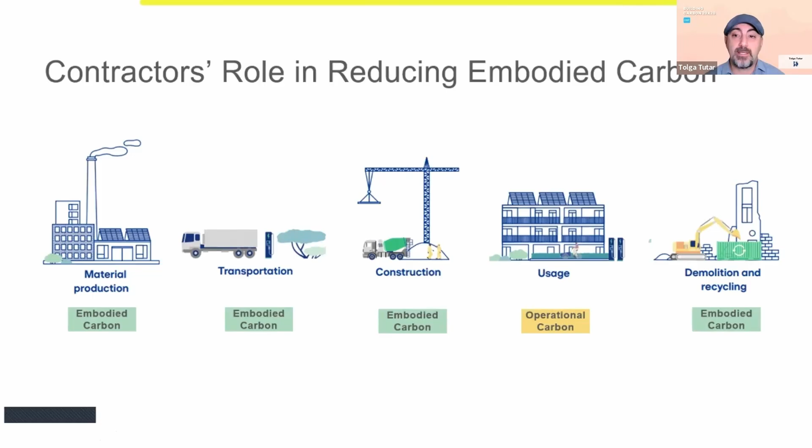As Stacey underlined, embodied carbon emissions associated with material production, transportation, construction, and end-of-life scenarios are critical. And general contractors like Skanska can make a big impact in addressing and reducing these emissions significantly in built environments. Embodied carbon is expected to be responsible for almost half of total new construction emissions until 2050.

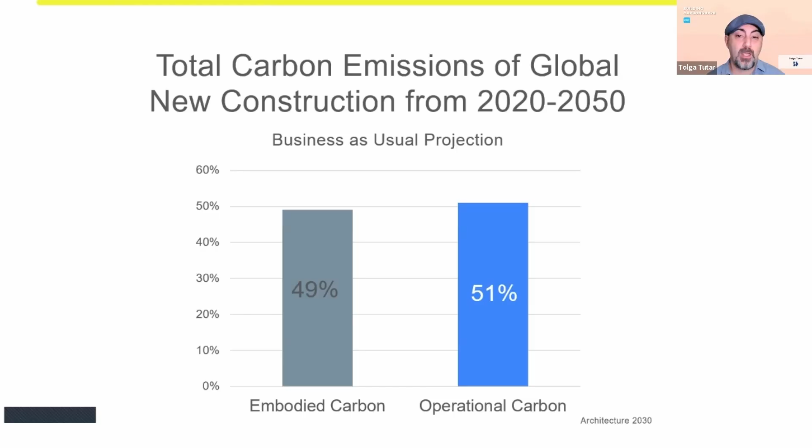And as general contractors, we are in construction business that we would like to grow, but we have the ability and responsibility to provide solutions to minimize the climate impact of the structures that we build. While we are expected to be doubling the amount of building floor space in the world in the next 35 years, which is equivalent to building an entirely new New York City every 35 days, what are the key strategies that general contractors can support or lead to address embodied carbon in the structures and the buildings?

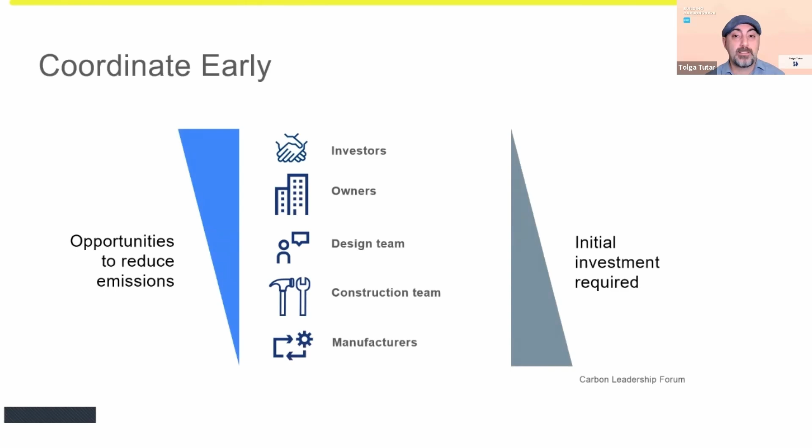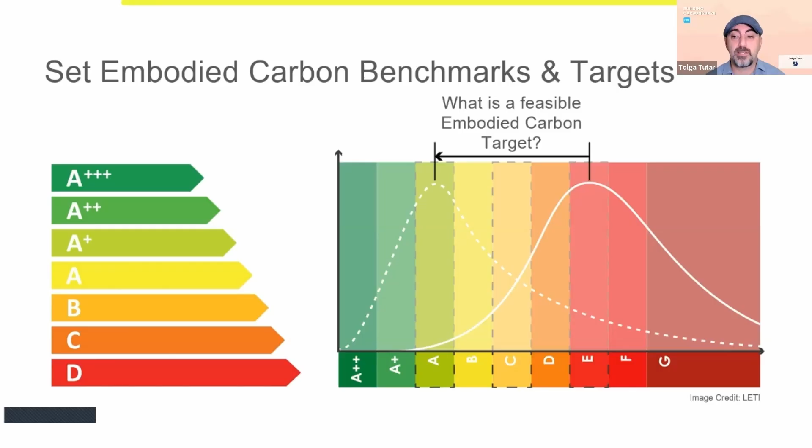Well, many low-cost, high-impact strategies to reduce embodied carbon require coordination with all key stakeholders early in the project. Contractors' early involvement in this process allows them to provide very valuable feedback regarding procurement, cost, material carbon data, technical feasibility, and more. Then, setting net zero embodied carbon targets early in a project is another crucial step to maximize reductions and also minimize costs. Contractors' feedback early in this process can really help in setting up these baselines and embodied carbon reduction targets for the project.

And to tackle embodied carbon, well, reusing buildings is very important. In a recent study we conducted, we have found that when an average performing existing building is demolished and a new energy efficient building is constructed, it takes between 10 to 80 years for the new building to overcome its construction-related emissions through efficient operations.

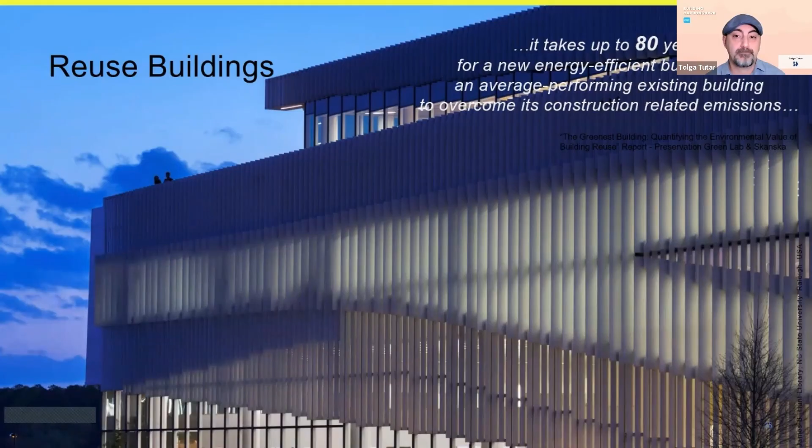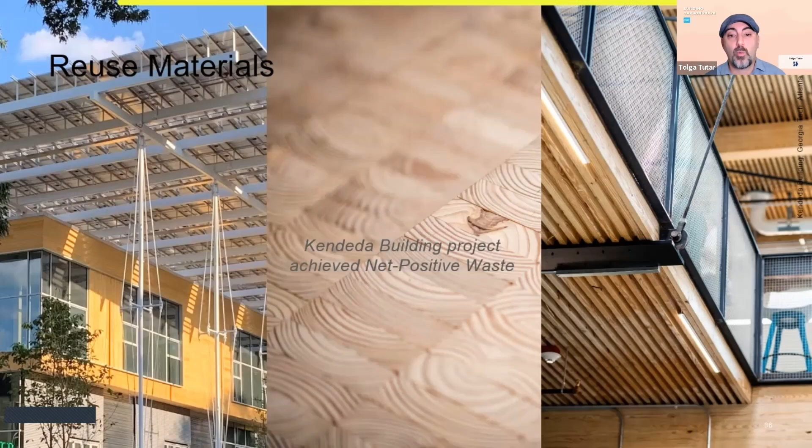And whenever possible, reusing materials instead of purchasing new products is another great strategy. In our Kendeda Building project, one of the most sustainable buildings on the planet now, our team achieved net positive waste by salvaging and reusing more materials destined to landfills than the amount of waste we generated on site.

And considering most of the embodied carbon is typically in the structural system, contractors should work closely with the structural designers and look for ways to achieve maximum efficiency on structural components to reduce the quantities of materials. This process can be expanded to all materials after addressing the big ticket items.

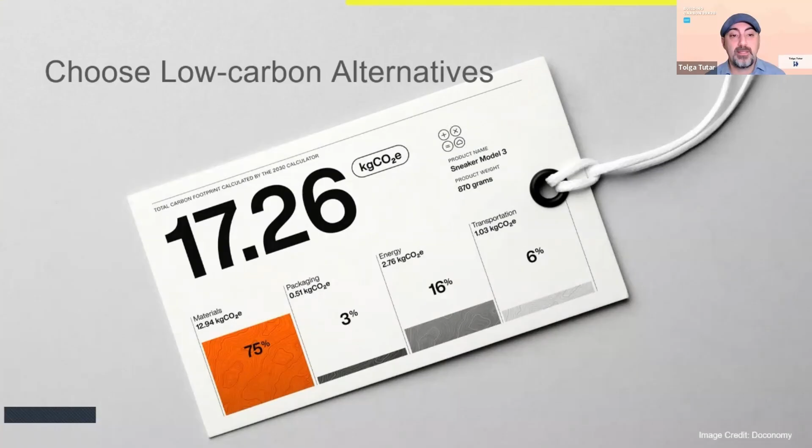And as Stacey mentioned, environmental product declarations or EPDs are great tools telling the life cycle impact story of a product. Project teams can choose low carbon alternatives based on EPDs, and requiring EPDs in specifications will further help contractors to ensure that the necessary carbon disclosure is provided during procurement.

Now we have the optimized material quantities and material-specific carbon data in hand. Contractors can play an important role with key milestones in creating and refining project embodied carbon estimates alongside cost data by utilizing tools like Embodied Carbon in Construction Calculator, EC3.

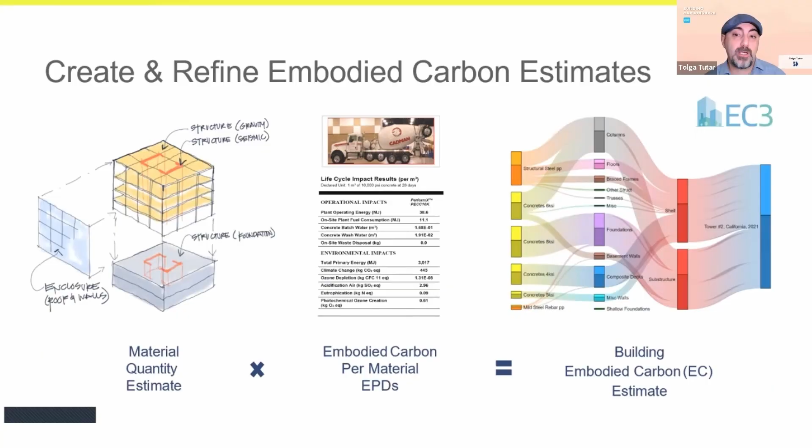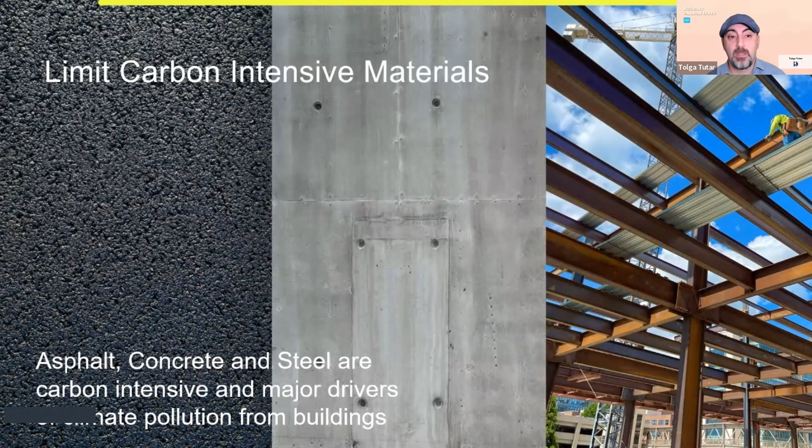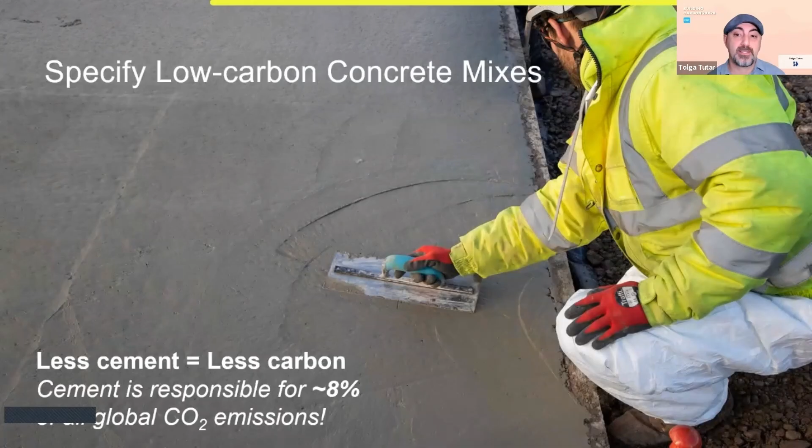And for products that typically have very high embodied carbon footprints, such as asphalt, concrete, and steel, thoughtful use is essential. It's important for contractors and design team to work together to limit such materials and opt for lower carbon alternatives as applicable. When we talk about concrete, to reduce the carbon intensity of concrete, it is important to reduce the amount of cement in the mix because it's responsible for 8% of all global CO2 emissions. And contractors should work closely with structural engineers to design low carbon concrete mixes by implementing innovative solutions.

Then next step might be using agricultural products such as timber, cork, or hemp insulation that sequester carbon, which is also crucial. In our Portland Airport project, we are building a 9-acre large-span mass timber roofing system, which is regionally and sustainably sourced and reduces the embodied carbon footprint of the project significantly.

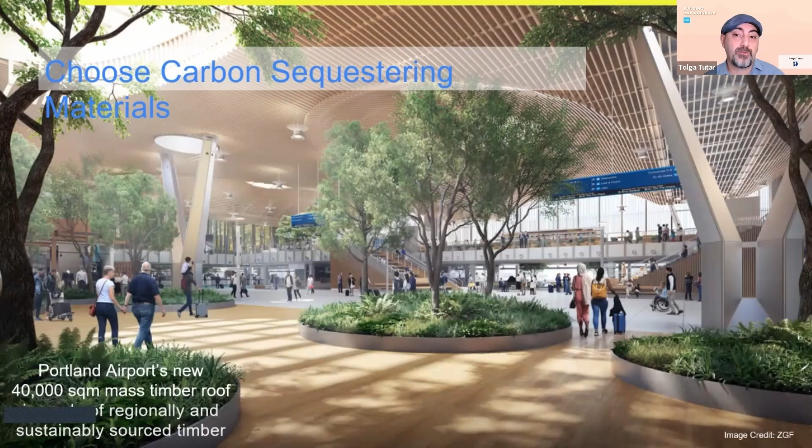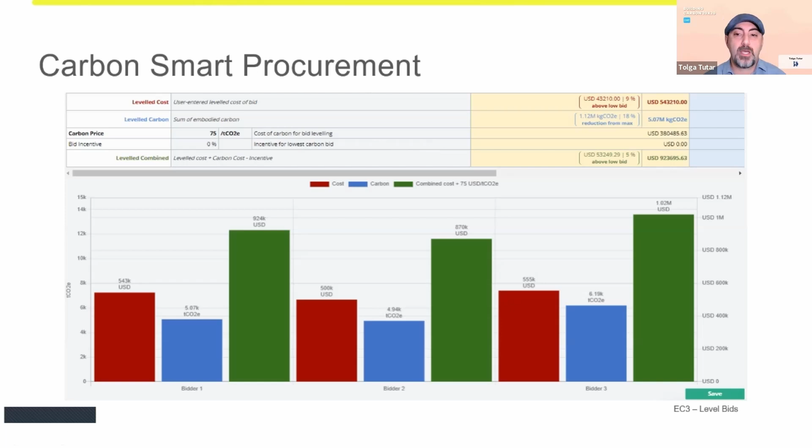Next, carbon smart procurement is essential. We can enforce subcontractor bids to contain the quantity, cost, and carbon data, which enables the bids to be compared with each other and evaluated against the initial carbon targets for the project, which can be done easily with EC3. And while talking about procurement of low carbon materials, we always get the question about the cost premium. In a recent study we published, we found that the embodied carbon footprint for most of the projects can be reduced 30 to 46% with minimal cost premiums, obviously depending on the market conditions.

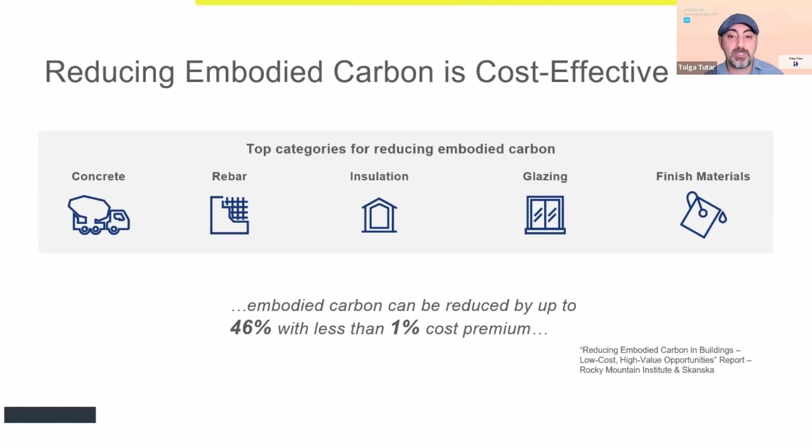And then as contractors in construction phase, it is essential for us to minimize transportation carbon emissions. Avoiding air freight and using ocean freight for internationally sourced materials, or choosing rail transport in lieu of trucking can make a big impact to reduce the embodied carbon footprint of your project. Also in construction phase, it is important to address construction site carbon emissions. Contractors can utilize all electric or hybrid equipment to reduce dependency on fossil fuels, and also evaluate the on-site or off-site renewable energy options for carbon-free energy generation.

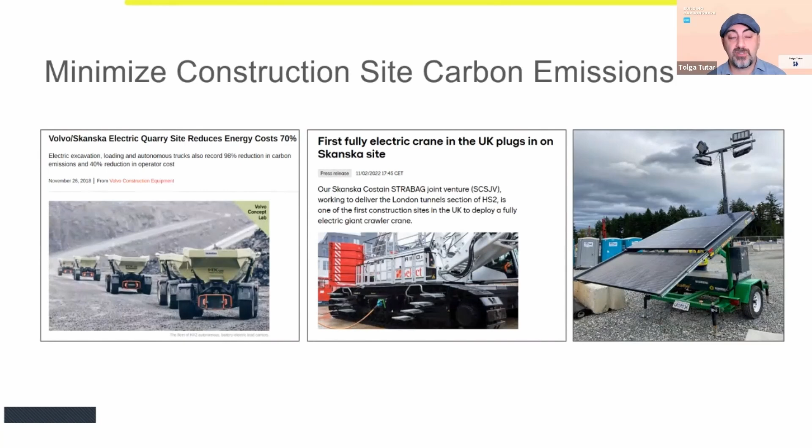Then the emissions due to deconstruction and disposal of building materials are part of the embodied carbon story. Contractors should prevent and minimize waste generation. Prefabrication, on-site waste separation, and using modular assemblies that are designed for deconstruction are some of the strategies to reduce construction and demolition waste.

Then after utilizing all the feasible strategies to actively reduce carbon on site, carbon offsets might be considered to achieve net zero. Offsets compensate for the remaining emissions by reducing them elsewhere through renewable energy or forestation programs, for example. But it's key to use offsets as last resort.

Overall, achieving net zero carbon emissions is feasible via collaboration, setting ambitious targets, and innovation in products, tools, and processes. And general contractors have a key role to play in this process. As a construction company with net zero carbon emissions goals by 2045, I hope you can join us on our journey. Thank you very much.